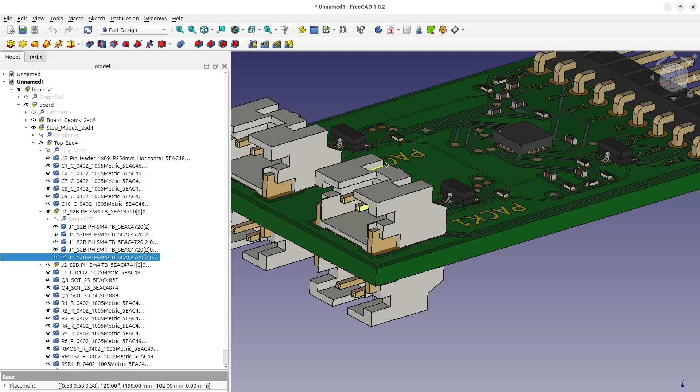Now let's move into a quick tutorial using ValiCAD. So, starting from this PCB design, you can see a good layout of this PCB. This is, I believe, a solar energy charger, and there are 4 clips, 2 on top, 2 on bottom, that kind of provide energy to the device, and the panel of the input, the solar panel.

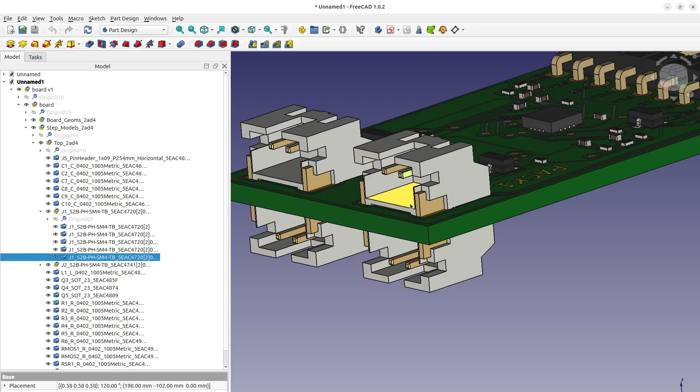So what you can see here, they have 4 clips here, 2 on top, 2 on bottom. And it's pretty smart that the designers put this metal reinforcement here for the clip. So when you plug in and plug out, this can provide extra strength to the clips.

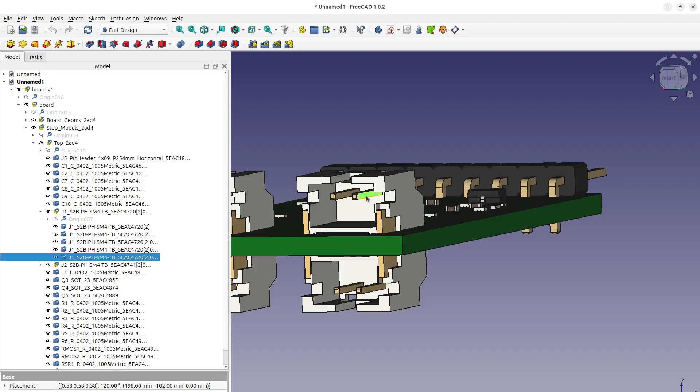However, after a second thought, I think there may be some creepage isolation risk here, from the upper pin through this metal, and then to the lower pin. So I have some creepage isolation concern here that I want to measure. And here's where ValiCAD can help quickly.

So if I pull up ValiCAD, I'm going to reset and clean all the selections here. Always start from select step file, the largest button here, and you select the step file. You have to load assembly here. Once you load it, it will come as a collapsed view. Select this, it will say step selected, click load assembly. There it is, it should appear here.

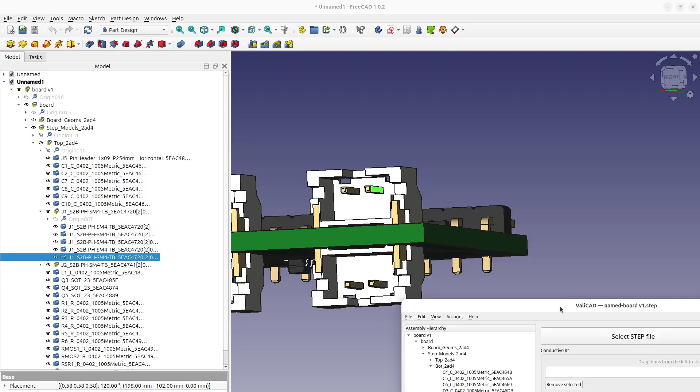Only the named parts can be measured, so you have to name the parts before you output the step file. This will help you select the right part here. First we need to select the 2 conductive parts. The first part I know is this one, the second part is here. In ValiCAD, I'm just going to select the first one here and the second one here. Once you drag it to the right place, it will disappear from the assembly tree to avoid double selection.

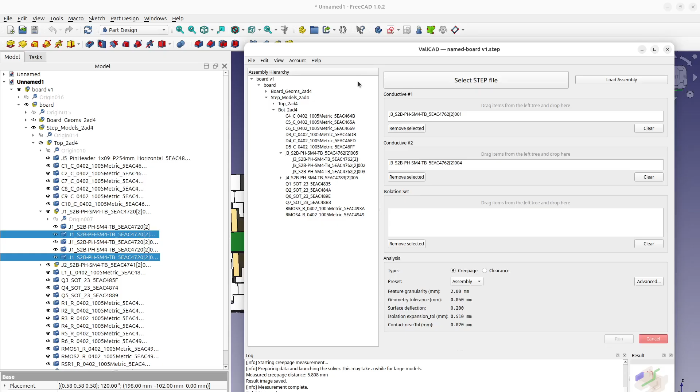And for the isolation part, here it is. You may select multiple parts. For example, the board, if you want to select it, you can. For isolation parts, you can add as many as you want, but for demonstration today, I'm only adding 1.

The other thing is setting up the analysis parameters. The default is assembly, and always start from assembly. Assembly gives you quick feedback, a rough estimation, and sometimes it's already good enough, especially for creepage, but PCB gives you the finest measurement. If I go to PCB, those numbers get smaller; go back to assembly, they get larger. Surface deflection is surface detail tolerance, so it helps you capture the curvature of the surface.

Isolation expansion is for when you select multiple isolation parts that have a tiny gap, and you want to close those gaps to form one single isolation part. This is the gap estimation. If your gap is 0.5, it will be captured by this 0.51 here.

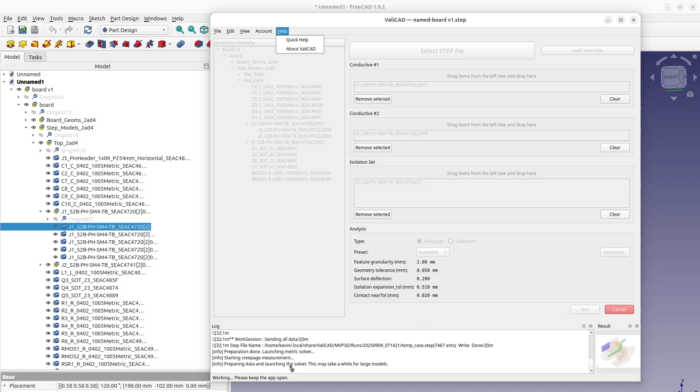Okay, it's running, should be pretty quick. There it is, the result is shown here. If you don't see this result, go to view, there's a result panel you can open. The distance we measured is 5.808, and there's a picture here. The isolation part is set as semi-transparent, and you can see the two conductive parts. The red line shows the creepage measurement.

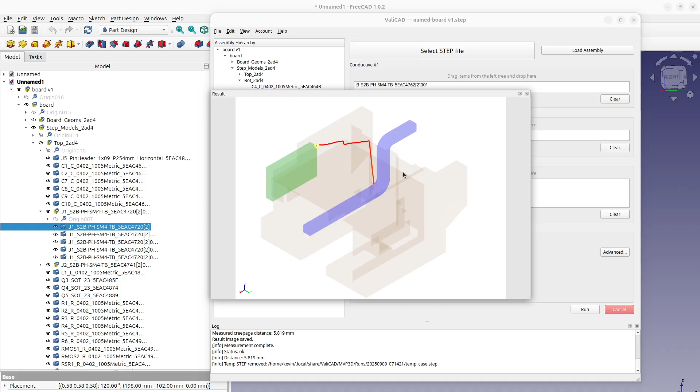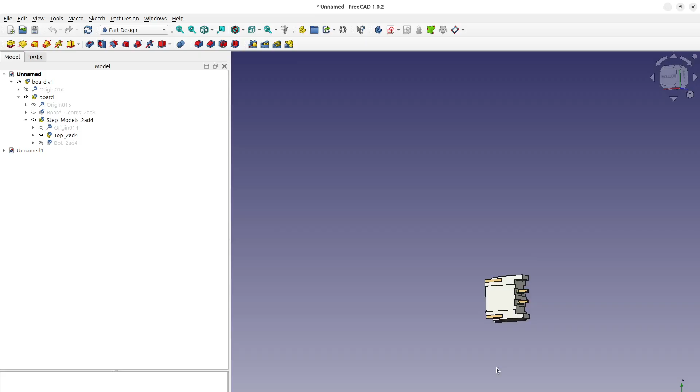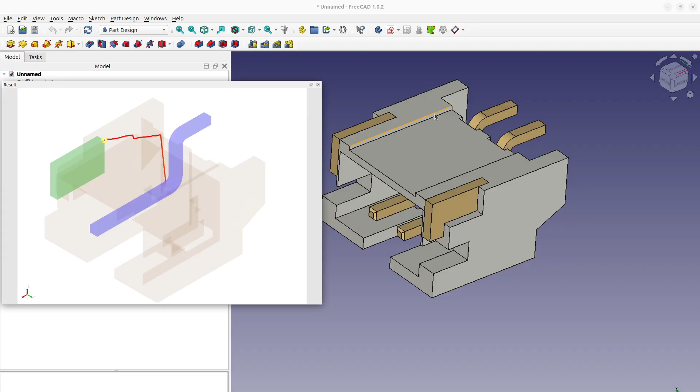So what does that mean? That may be confusing, but let's go back to the CAD. I want to isolate just this part and rotate it a little bit upward. Now if I show the picture, it will make sense. The path starts from the bottom of the clip, goes through this step and down to where the pin touches the case of the clip.

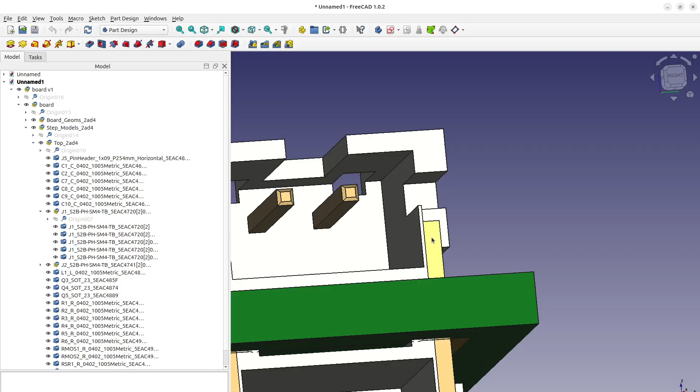That's very interesting because, to be honest, in the beginning I thought the shortest creepage path might go from the front view here, through the pin to the metal reinforcement directly. Alright, so that's a quick measurement as you can see here.